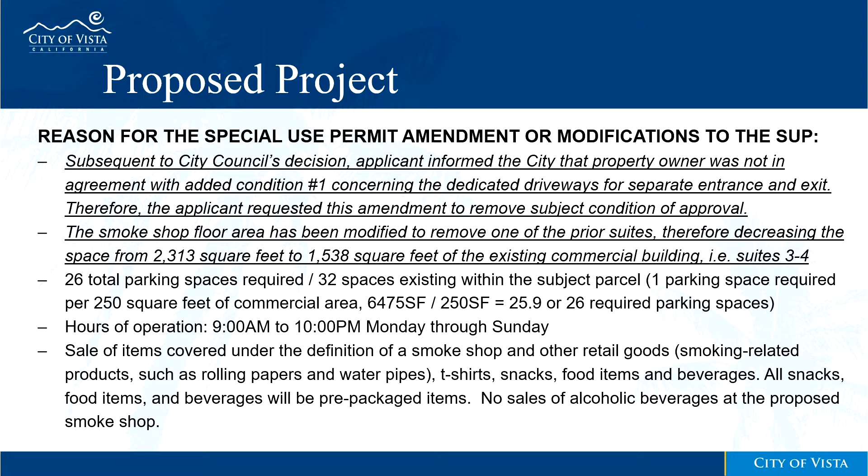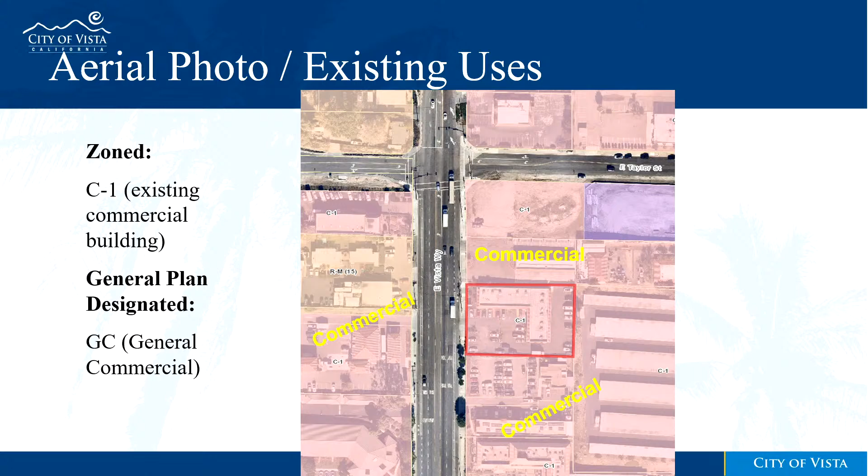The zone is C1, a basic commercial zone. The designation per the general plan is general commercial, GC, and it's surrounded by commercial uses to the north, south, and across the street, as shown on this slide.

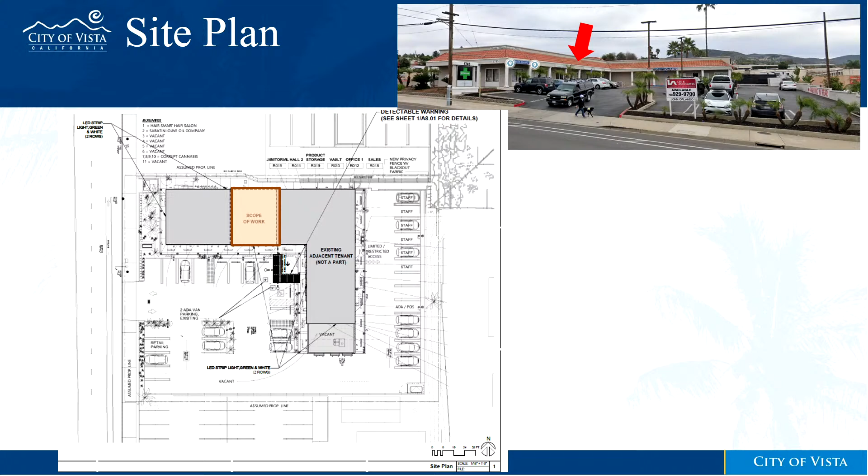Here's a depiction of the subject project site as it exists today, and the site plan identifying the smaller footprint floor area for the proposed smoke shop. The red arrows identify approximately the location where the smoke shop would be located, next to the existing cannabis store operated by the same operator, off the charts.

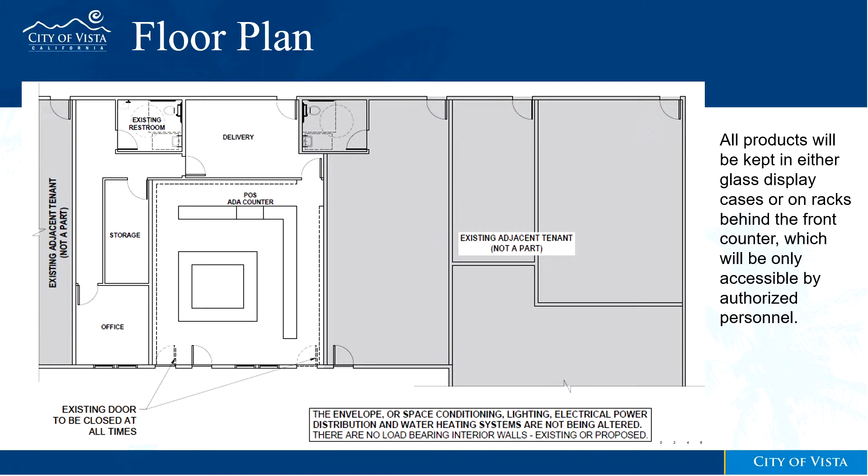The floor plan here shows the smaller footprint with the products kept in either glass display areas or cases on racks behind the front counter, all of which would only be accessible by the authorized personnel working at the store.

From an environmental review perspective, the project is categorically exempt from requirements to prepare an environmental document.

So staff looked at it for infill development project and meeting the infill conditions of Class 32 exemptions related to being consistent with the applicable designations in the general plan and the zoning ordinance, developed within city limits on a site that's no more than 5 acres.

The project site does not contain habitat for endangered, rare, or threatened species. It is a developed site, as we all know it. The approval of the project would not result in significant effects as far as noise, traffic, air quality, water quality, and the site can be adequately served by all required public utilities and services.

The general plan, as far as the special use permit approval and adherence to all the conditions of approval, with that, the project would conform to the policies of the general plan.

And as far as the development code is concerned, the approval of the special use permit for establishing the smoke shop and the findings for such special use permit are included in the resolution of the special use permit.

There is one condition, the understanding that the smoke shop will not be located within 1,000 feet of a public or private elementary or secondary school, and there is no private or public elementary or secondary school within 1,000 feet of the project site.

With that, the recommendation is for the adoption of the resolution, that would be granting the modifications to the special use permit for the smoke shop at 1745 East Vista Way, Suites 3 to 4.

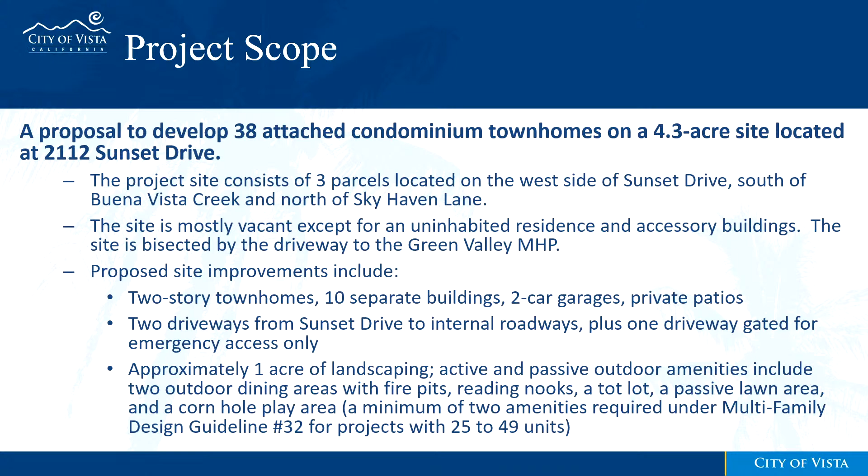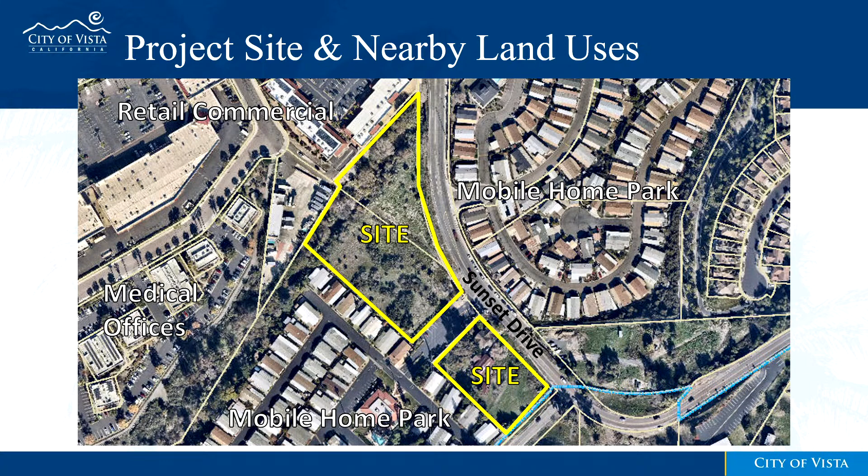This aerial image shows the project site and surrounding land uses. The project site is bisected by the driveway to the Green Valley Mobile Home Park. On the other side of Sunset Drive is the Santiago Mobile Home Park. To the north, across Buena Vista Creek, there is retail and commercial service uses. And to the south is the City of Vista boundary adjacent to Oceanside.

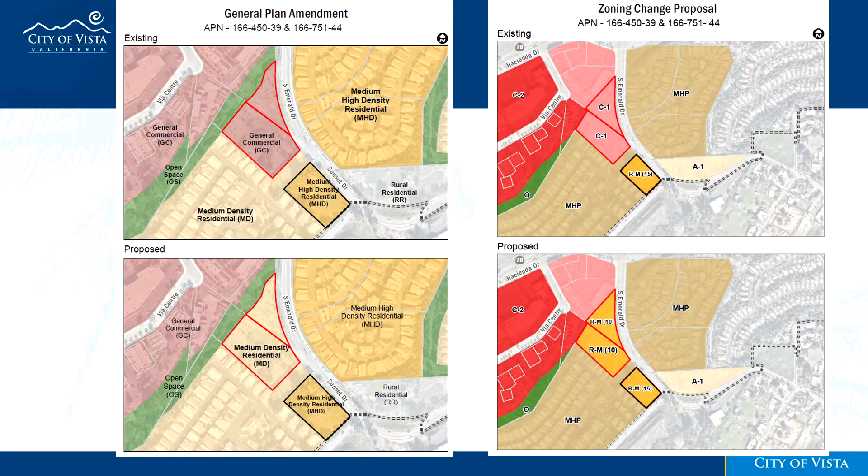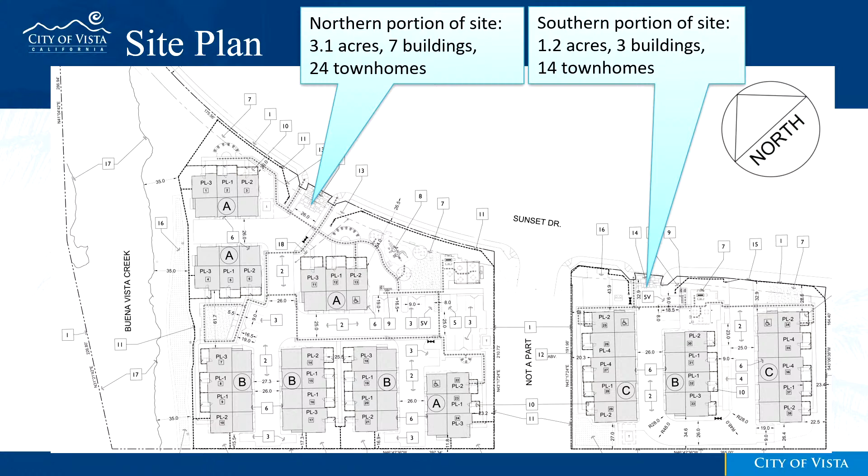The project includes decorative paving at the project entrances. The gated emergency access would be the furthest driveway towards the right-hand side of the slide, and that would be gated as mentioned.

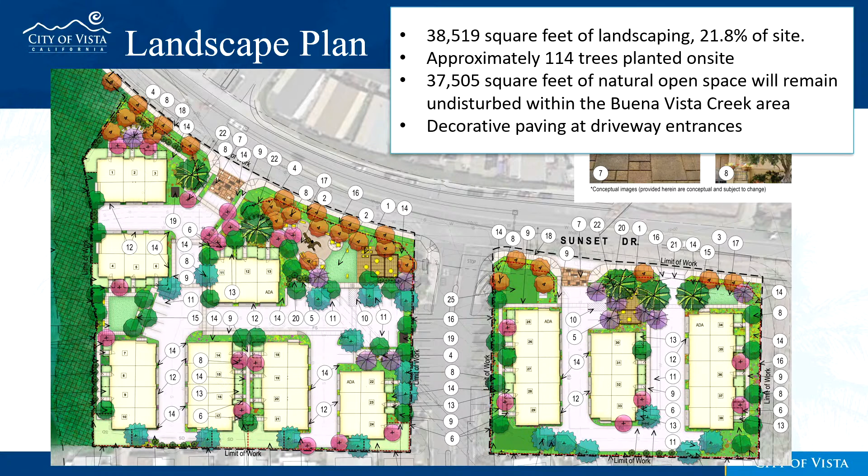The southern portion is very similar. It also features a dining lounge with a shade structure, barbecue areas, a fire pit, and so on, as well as what is depicted on the north side.

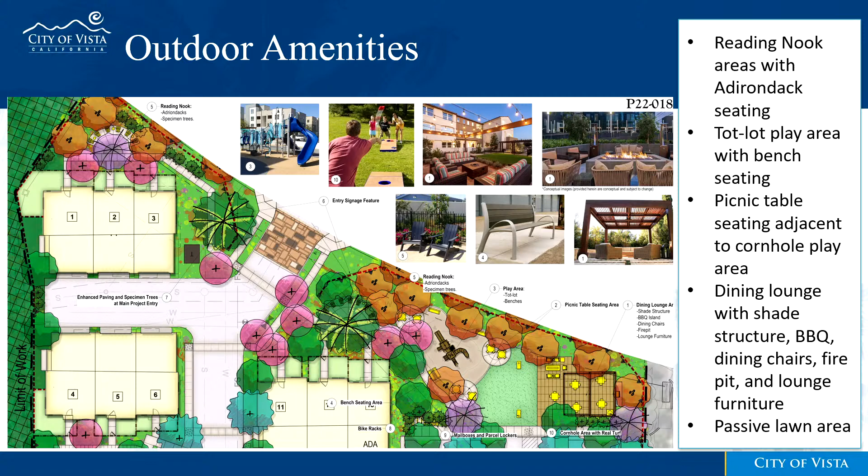The project would also be required to install 2 speed feedback signs at either end of the project site, for traffic going northbound or southbound. Those are the type of signs that flash the driving speed at drivers as they pass by, so they know if they're exceeding the speed limit.

Other improvements would include curb, gutter, sidewalk, and a bicycle lane on the project side of the street, and the sidewalk would connect to the existing sidewalk that's north of the project site.

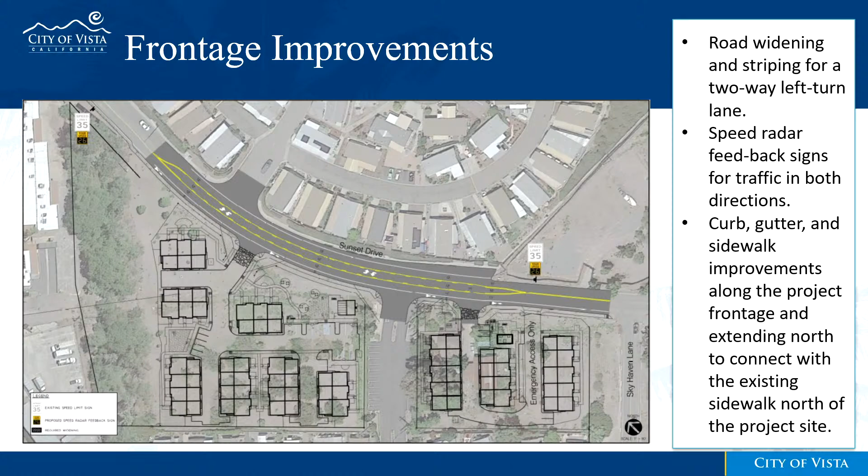Regarding the townhome structures, the project would be developed with an average density of approximately 9 units per acre—8 units per acre on the northern portion of the site and 12 units per acre on the southern portion. The project includes 4 different floor plans, with sizes ranging from 1,440 to 1,780 square feet, including 14 2-bedroom units and 24 3-bedroom units.

On the first floor of the units, there is a 2-car enclosed garage for every townhome, kitchen, living, and dining areas, and a half bath. On the second floor, there are 2 or 3 bedrooms, full bathrooms, and washer and dryer hookups. Additionally, 30 units would include a loft area on the second floor designed for use as an upstairs living room.

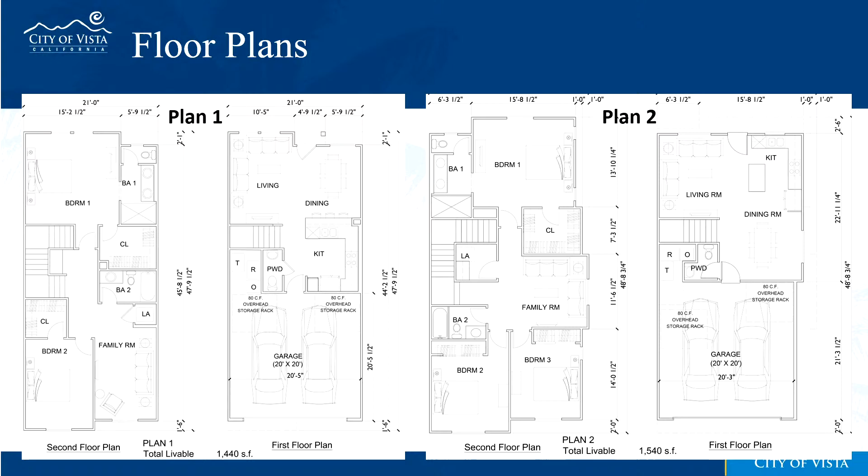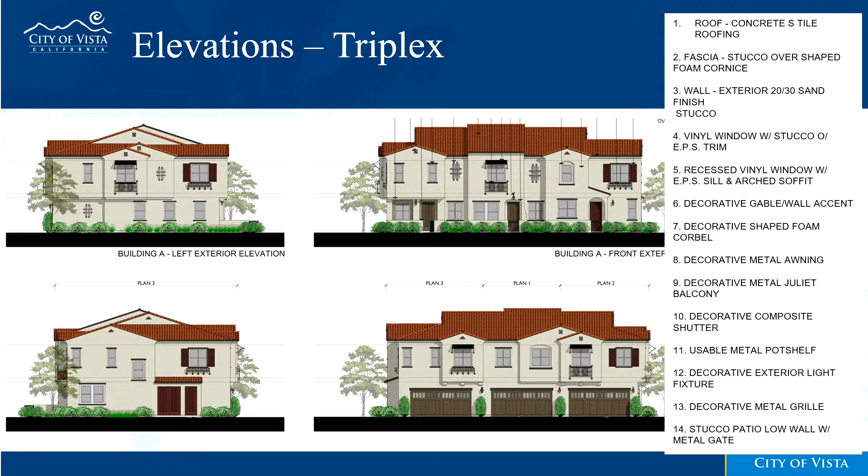These are the elevations for the triplex buildings. Everything is done in a Spanish style of architecture with concrete S-tile roofing, wrought iron features on the walls and around the window areas, faux Juliet balconies, and decorative gable accents.

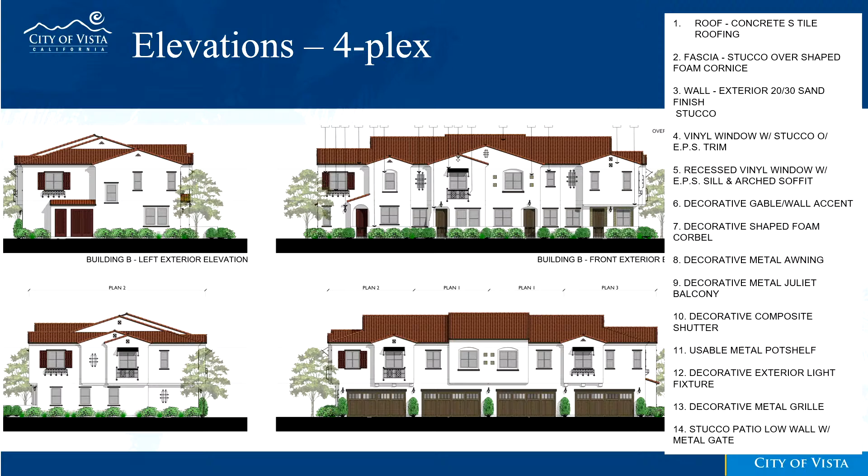Regarding project parking, the 14 2-bedroom units require 2.5 parking spaces per unit, totaling 35 spaces. Adding that to the 24 3-bedroom units, which require 3 parking spaces per unit for 72 total spaces, the total required for the overall project is 107 spaces.

The project provides a total of 110 spaces—76 of those are 2-car garages, and there are 34 open guest spaces. Of the guest spaces, 10 are located on the southern portion of the project site, and 24 are located on the northern portion.

Under public policy, general plan conformance, the southern portion of the project site is currently designated as medium-high density residential by the Vista General Plan, which allows 15 dwelling units per acre. Since this portion is approximately 1.2 acres, construction of 14 townhomes would result in a density of approximately 12 units per acre, consistent with the existing MHD land use designation.

The northern portion of the site is currently designated as general commercial. Since this portion is 3.1 acres, construction of 24 townhomes would result in a density of approximately 8 units per acre, which would be consistent with the medium density residential land use designation.

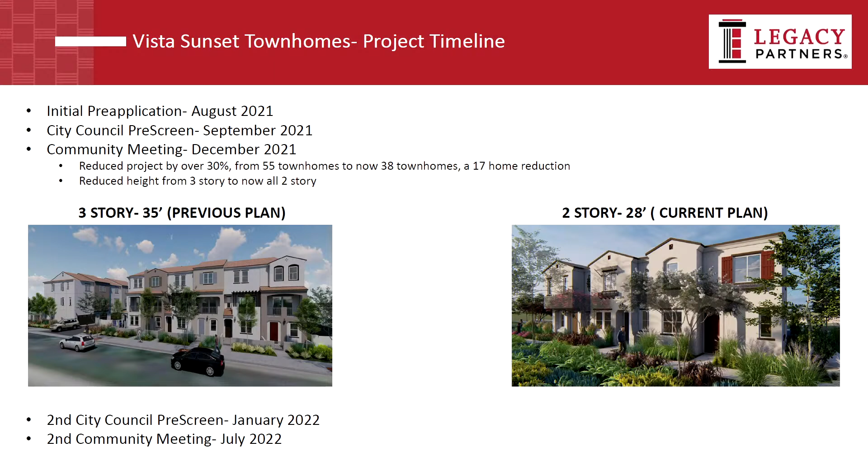Chris did a good job going over the site plan, 4 different plans, range of square footages, 2 and 3 bedrooms. We do exceed parking standards barely, and we do exceed open space requirements, common and private.

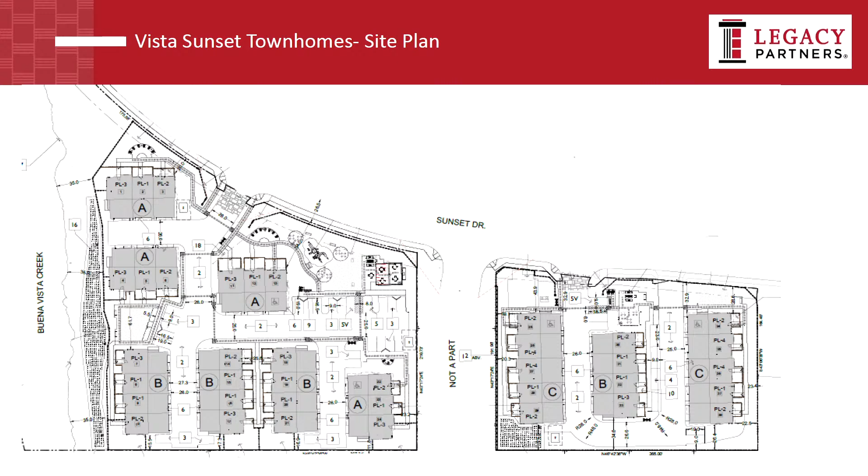Here's just the renderings, some attractive Spanish architecture. It's 20 feet to the eaves and about an additional 10 feet to the pitch of the roof. We can play with that height. It's worth noting that in the C1 zoning on the northern parcel, that allows up to 35 feet.

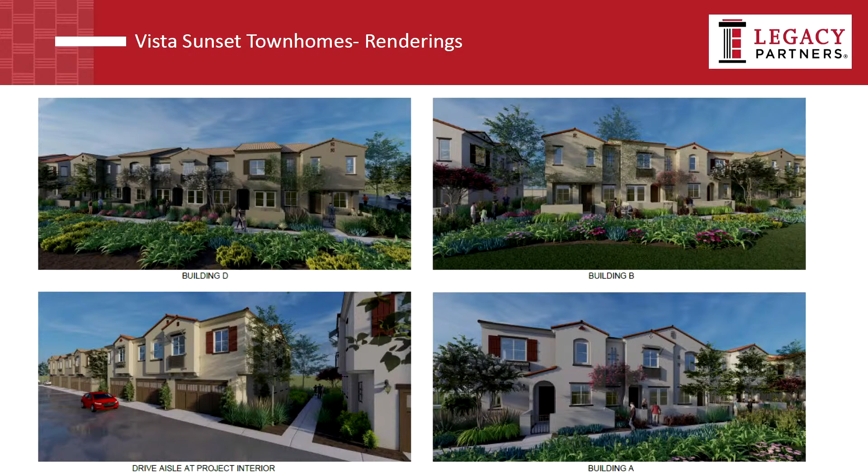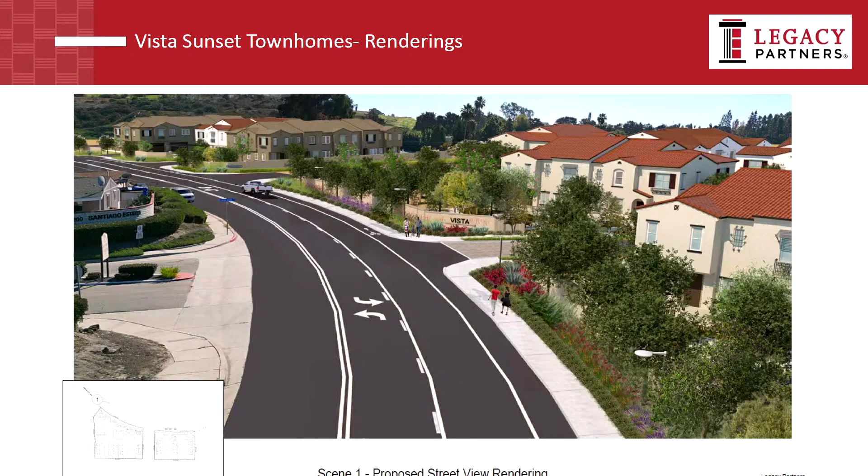Here's some renderings, not 100% to scale. Our landscape architect did his best, but we were pleased with this image. What this shows is how that street, currently a 2-lane with no improvements, just raw land, where we've added the yield lane, restriped, added a bike lane, new curb, gutter, sidewalk, and a nice landscape setback. Here's the northern parcel entrance.

So the biggest part of this was trying to accommodate the community's feedback and concerns. We held 2 community meetings, about 15 attendees per meeting. These bullets were the common theme of the feedback, so we went to work trying to address each one to the best that we could.

Traffic being the most important, so I'll touch on that last.

Homeless - there's been history here that people have lived on site, lived in that home, have destroyed that home. They even had gardens back there, and the landowner has had to move them off the property a lot of times. I think some of those folks have meandered into the Green Valley community, which was expressed to us during one of the community meetings. So I think adding housing and removing the blight will hopefully eliminate a lot of those issues.

The condition of the wall along our property line on the western edge between Green Valley and our property - there's been issues with that wall falling over, there's a tree growing through it. The current landowner has had to deal with that, working with the property manager, Bruce, but we are intending to replace that wall.

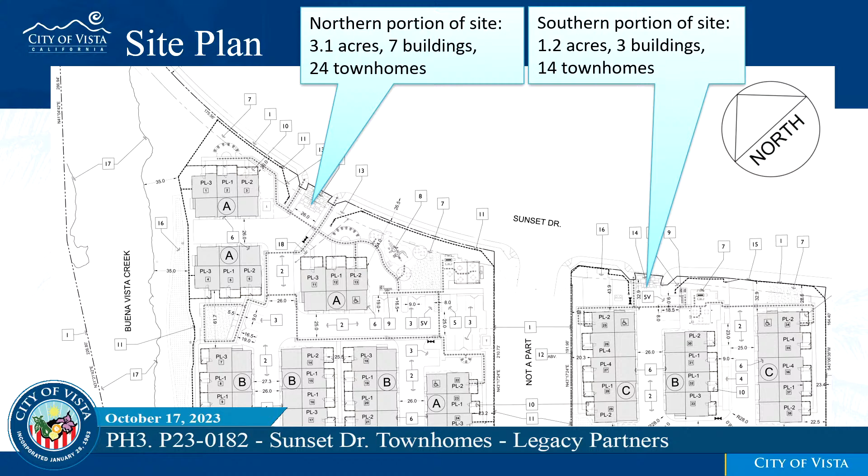The rear is 5 feet? The one to the mobile home on the west, that's 5 feet, right? I'm talking about this right here. We did have one setback, I believe unit 24, that needed to be corrected. There was an inconsistency on a couple of the plan sheets. On the exhibit currently shown, it shows 11 feet 8 inches, and that needs to be adjusted to 15 feet. That is one setback issue we're aware of. Oh, that's 15. Okay, thank you.

There's a lot of lines on the civil drawings, and if they could have been more clearly designated, it would have been very helpful. Thank you.

So, if that does it for our questions, thank you very much, Mr. Pinto. I'm sure you'll be back.

We'll open the public hearing, and the first speaker is Steve Harvey, followed by Joe Frischman. Mr. Harvey, you have 3 minutes.

Before I start my 3 minutes, you guys have a copy of this? Yes, I brought one for you. Yes, okay, and you mentioned it, John. Thank you for mentioning it. I'm just going to highlight it, it's too long to read in 3 minutes.

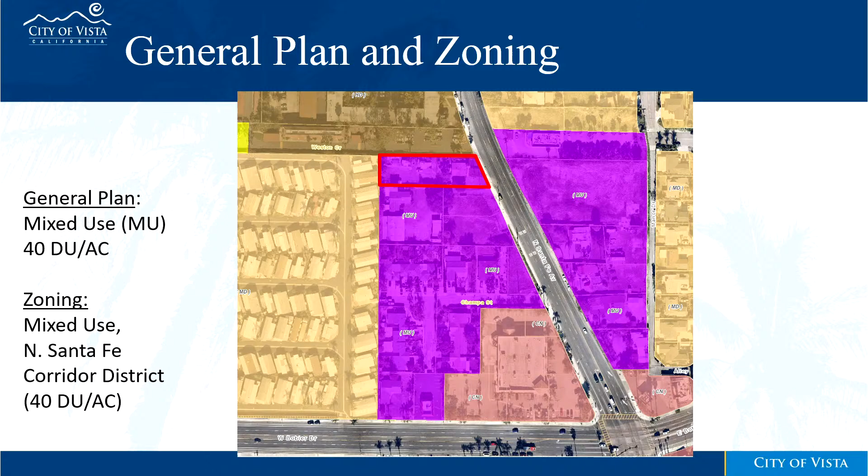The zoning is mixed use with a North Santa Fe Corridor District, at 40 dwelling units per acre.

In terms of the project, once it comes formally through to us for review, it would require a site development plan, and being in the mixed-use zone, the total is 33 apartment units, with 4 allocated for very low-income households at 50% of the area median income.

The setbacks are 14 feet 4 inches on the front, 66 feet on the rear, 4 feet on the side. That actually is encroaching into the setback, so potentially that would be one of the concessions allowed under the state density bonus law.

24 would be 1-bedroom units, and 9 would be studio units. The proposed density is 62 dwelling units per acre, where 40 is allowed per the general plan.

The height is 4 stories, approximately 59 feet 7 inches. Maximum would be what's proposed.

The residential parking would call for 42 spaces required per the MU40 zone. 33 spaces are provided, per the state density bonus parking ratio, which allows it at 1. So the requirement would be only 33 spaces total instead of the 42.

When you have 25 or more units as part of the project, you are required to provide 2 recreation amenities. There are 2 common decks, a co-working space, and a bicycle storage being proposed right now to meet the requirement for recreational space and amenities.

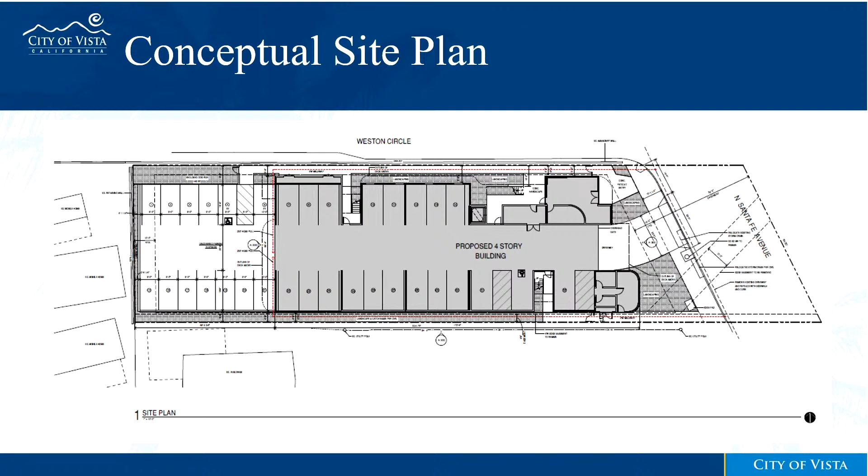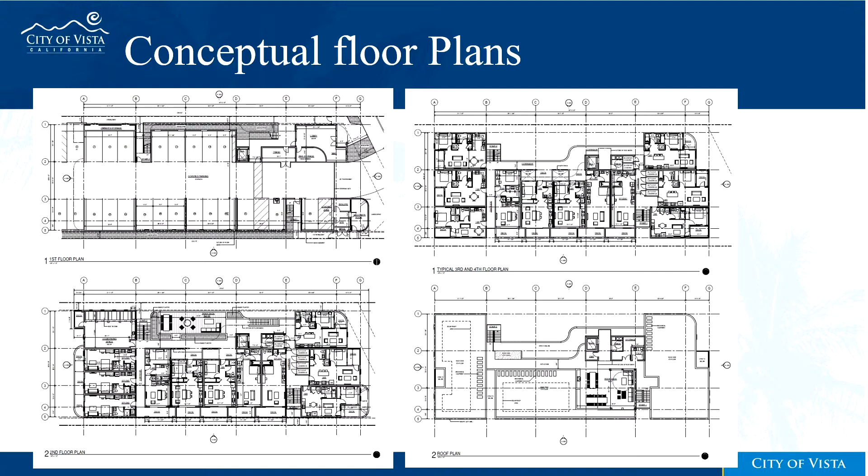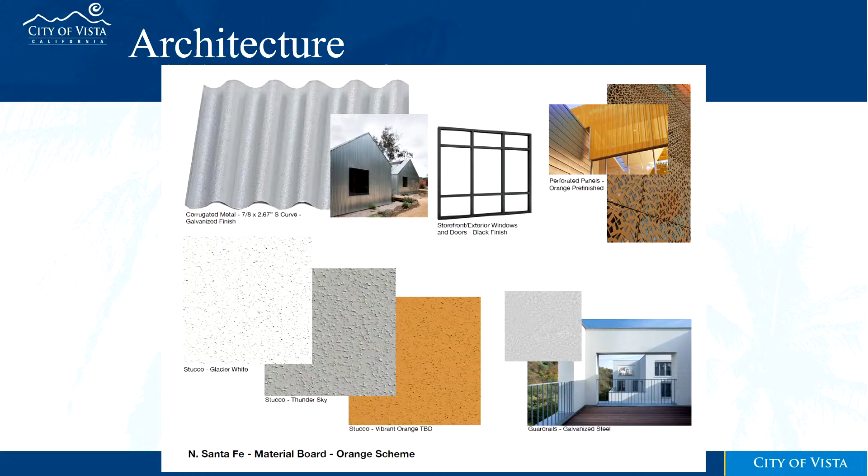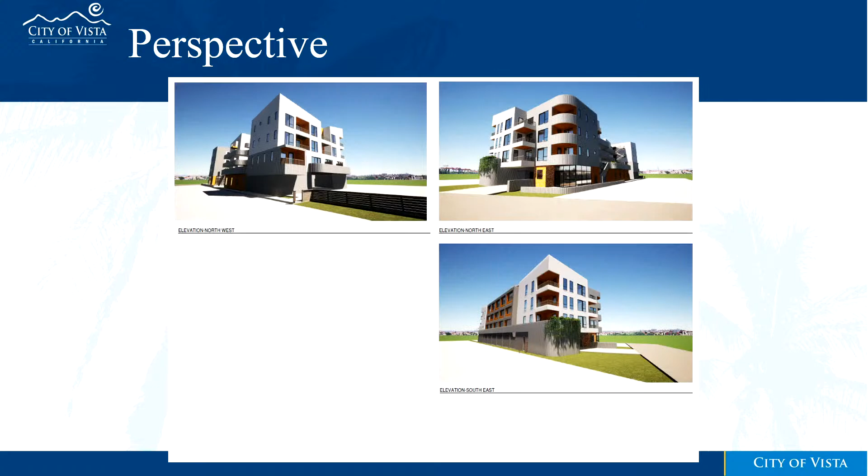The staff request here is for the Planning Commission to provide direction to the applicant related to the proposed design of the project. No formal vote action is sought tonight on this item, and we're here available for any questions. Staff is available, and the applicant as well in the audience.

Thank you very much. So the applicant doesn't have a presentation? They do not. Okay, very good.

Commissioners, what we normally do in the EDRs is first talk about the site plan and the layout, then the floor plans, then architecture, and then amenities. So any comments on the site plan for this project?

Commissioner Savage: I never know when to talk about trash, so it's kind of site-related since it's inside the building. I'd be very curious to see how they're going to handle the trash. Looks like they'll have to wheel out the trash to the street or maybe to the driveway. I don't know if we could ask the applicant, but I don't know if you guys have contacted EDCO for a plan. I know that would definitely be something we'd like to see before the actual hearing.

Name for the record, please. My name's Colin Lowry, I'm the architect. No, we have not contacted EDCO yet. And yeah, you're correct, it's within the building, so we would have to wheel out the trash bins on trash day. But that allows us to give them a trash chute as opposed to tenants dragging their trash to the trash room, so I guess it's a trade-off.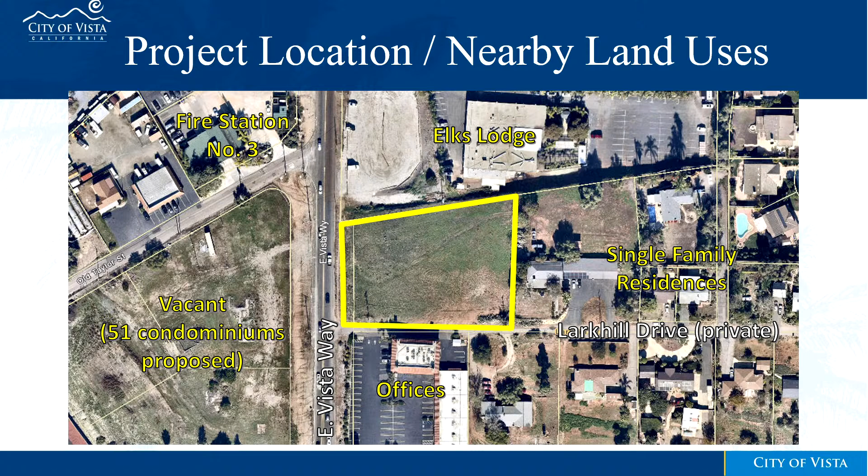This is an aerial image showing the adjacent land uses and the vacant project site. There is a 51-unit condominium project proposed west across East Vista Way that should be coming up at some point. Fire station number 3 is to the northwest, Elks Lodge to the north, and existing single-family residences towards the east. There's an office building immediately to the south on the other side of the private drive.

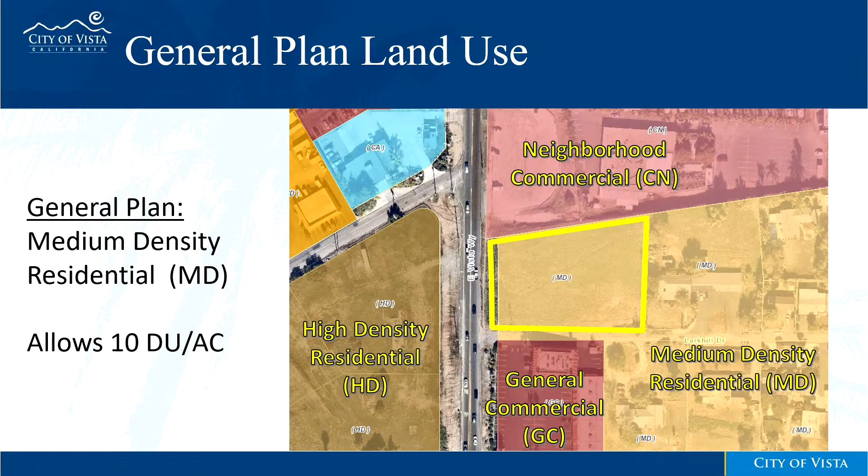The existing general plan density or designation for the property is medium-density residential, which allows up to 10 dwelling units per acre. The zoning is RM10, which is consistent with the general plan.

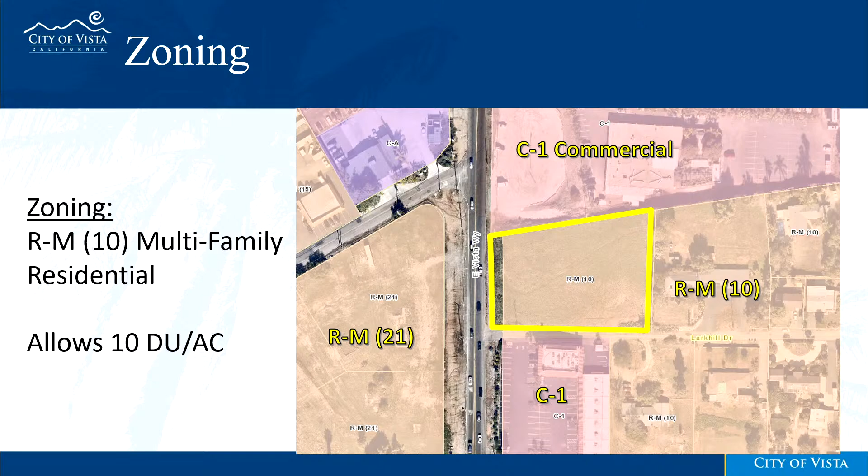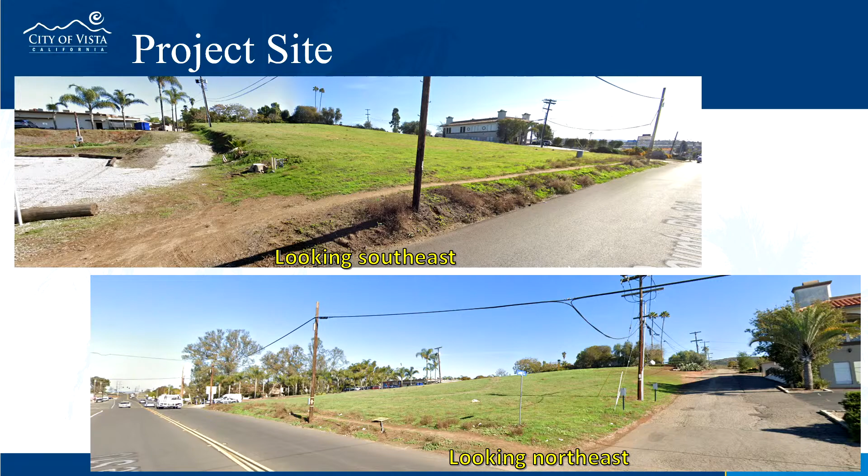The project is proposing 13 apartments in 6 buildings. All 3-bedroom units are proposed, ranging from 1,290 to 2,661 square feet. 2-car enclosed garages are included for each unit, and 2 of the units do include 3-car garages. The proposed density is 9.5 dwelling units an acre, which would comply with the 10 dwellings an acre that's allowable. The height of the structures is 2 stories, 26 feet, 8 inches. Maximum allowed in the zone is 35 feet.

For parking, there's 41 total, consisting of 28 garage spaces and 13 guest spaces, where 39 are required by the zoning ordinance. For open space amenities, there's 5,268 square feet of common open space provided, where 4,875 square feet are required. Each unit features a private balcony ranging from 132 to 224 square feet, and each unit features private ground level open space ranging from 300 to 560 square feet.

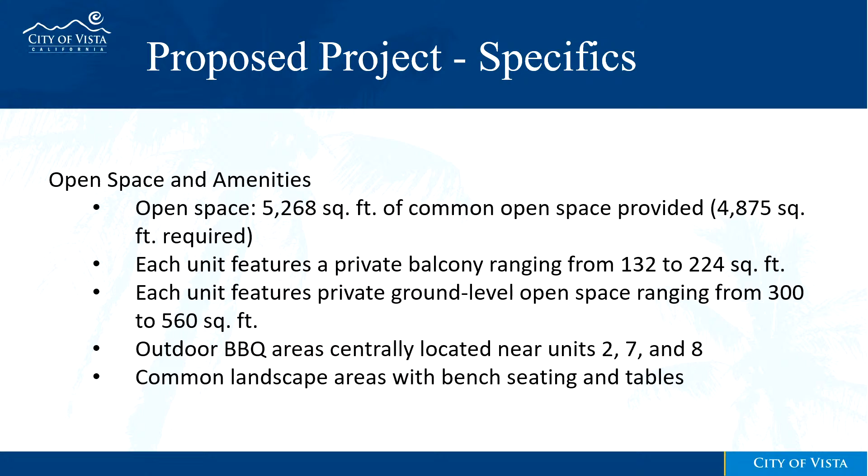Outdoor barbecue areas are centrally located near units 2, 7, and 8, as will be shown in a subsequent slide. Common landscape areas with bench seating and tables are located in the central area of the project site.

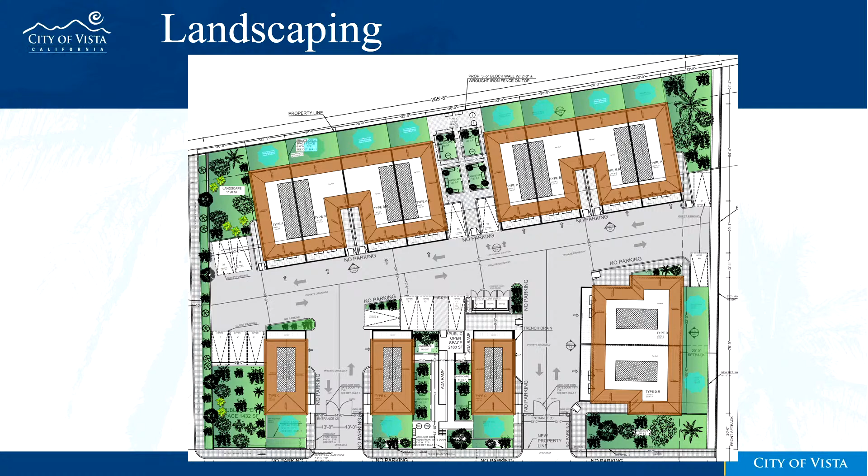The project proposes 2 fourplex buildings, which is unit type A, with 4 units, and unit type B, also 4 units. These range from 1,600 to 1,900 square feet. There's 1 duplex building, which contains the largest units on the property, located towards the rear on the right-hand side of the slide, approximately 3,000 square feet. There's also 3 single unit buildings, which are type C, just under 1,300 square feet in size.

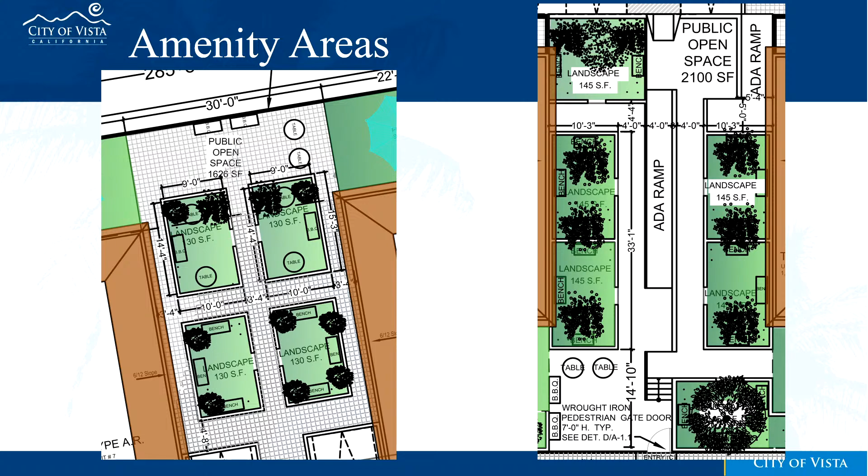These are the amenity areas that I mentioned, small landscape areas adjacent to barbecue areas, basically with seating and tables for passive use.

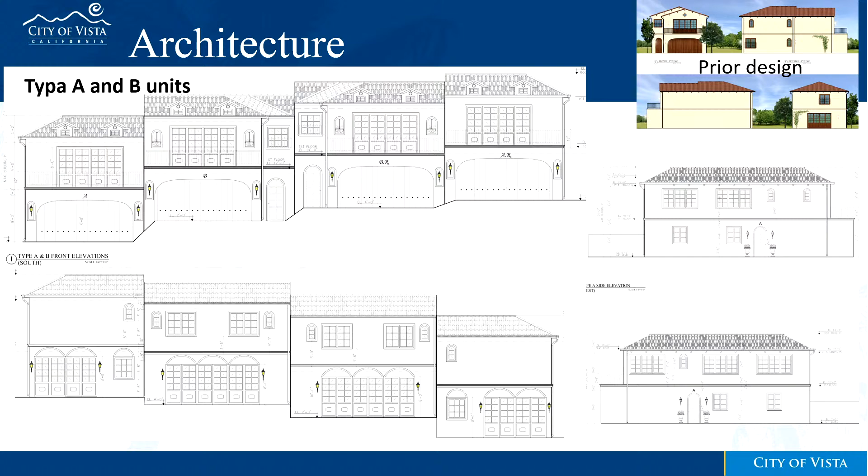A few other modifications were made. One of the primary changes was to the roof line design. This slide also shows prior design at the upper right, and these are the black and white elevations for the fourplex buildings.

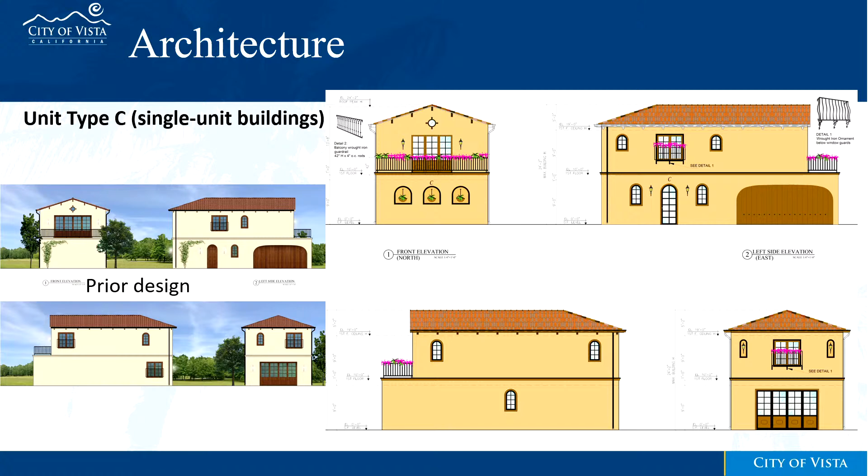This is unit type C, which are the single standalone units, shown as prior design and as revised and proposed. And this is unit type D. One of the comments previously given was to break down the large 3-car garage door, and that's one of the changes represented on this slide.

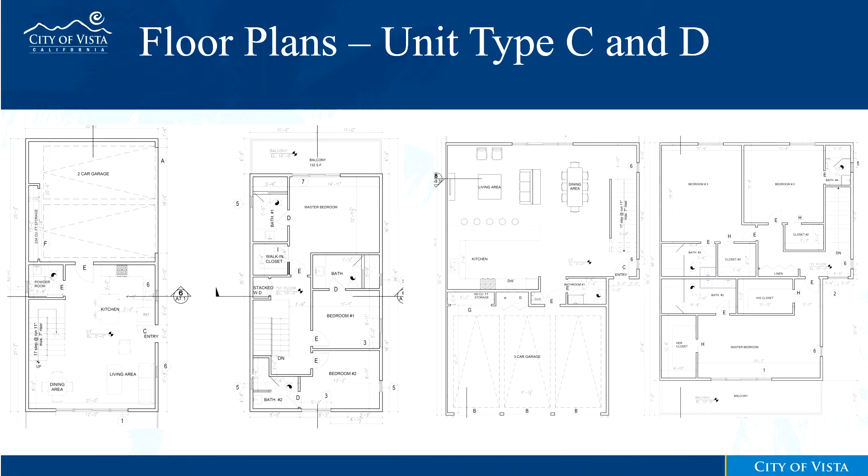The floor plans are shown on the next slides for unit types A, B, C, and D. They'll be available for discussion with the applicant, and staff requests that the Planning Commission provide their comments regarding the proposed design.

Thank you. No presentation by the applicant? No. Okay. He's getting up. Come on.

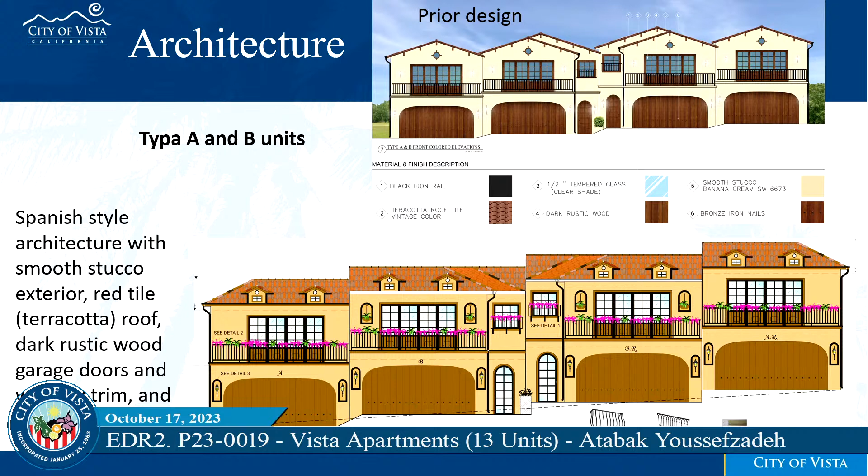Good afternoon, my name is Atabak Youssefzadeh with Metropolis Architecture. Thank you for your help and work here. Thanks, Chris, for all the help. I'm here to answer any questions that you have. Okay, very good. Hang on. Well, I'm sure there'll be some.

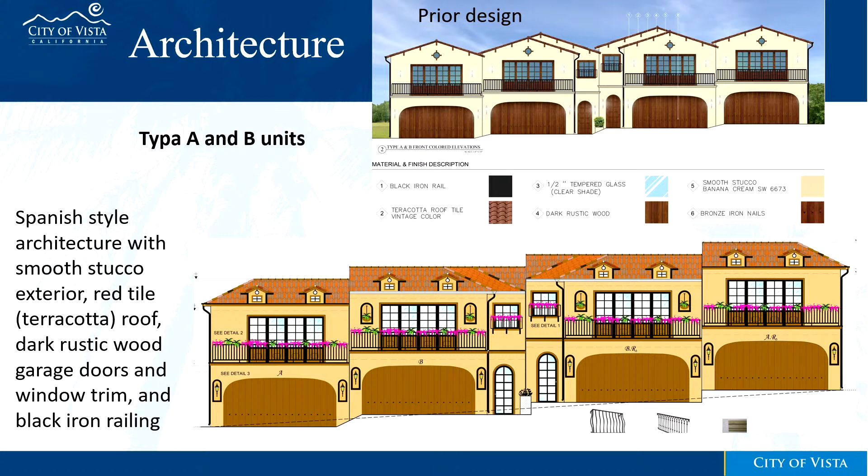Commissioners, comments on the site plan? Commissioner Savage: this is somewhat site-related, about the street, Lark Hill Drive there. This might be a question for staff, but that's a private drive, so we don't really have any authority on enforcing paving of that road, correct? I believe that's correct, yeah.

So there was some concern from citizens behind the property. I didn't know if they had made those available to you, but we did receive some emails concerned about construction traffic on Lark Hill Drive and the damage it might do. I don't know if you've had any contact with the community yet about that, or if there's any plans. Chris spoke to me about the problem that might arise because of the construction.

And if there is any breakage or any problem with the road, we'll basically repair that and blacktop over the road, so the neighbors would not complain about the condition of the road.

I really like a lot of the things you guys did. I know it's architectural, but the sides of the buildings, you guys did an amazing job changing that up, so I appreciate that. Thank you. Mr. Looney made some great comments last time, and we appreciate that. We went back to the drawing board and implemented that.

The owner is here. He's owned this property for the last 30-some odd years, and he does not plan to sell it. He wants to keep it in the family, so this is going to be one that's going to be keeping in this family.

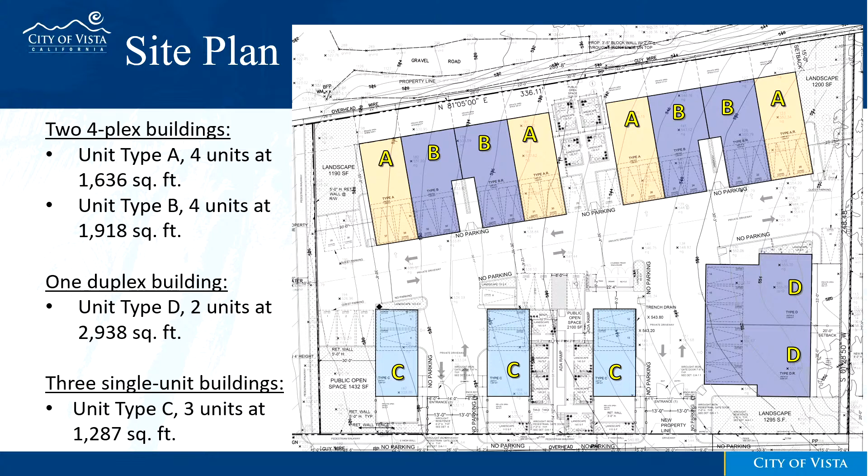The walls have to stay under a certain elevation, like site walls. I'm not really sure, for a private drive, I don't necessarily know that the city would be reviewing it. Generally, it is something we look at when a driveway is exiting onto the public right of way. We're going to review the site plan for any proposed structures, monument signs, or anything that might obstruct view. Okay.

This seems better than last time for sure. You guys did a good job of pushing that back and making sure that it is a little more visible. That'd be something I'd consider while you guys are doing design - just make sure that everyone's safe when they're leaving the driveways, that there's nothing obscuring their views. And I don't think you guys have.

I haven't had a great time looking at it, but the landscaping at the edge of the C buildings there - just making sure that any walls or fences right there don't obscure view, keep everybody safe. Okay, I'll review that to make sure the view is right for the drive. Yeah. Return. Okay, any other comments on the site plan?

Commissioner Looney: Yeah, it's good to see some improvements. One of the comments that was made last time was to have a civil engineer do a grading plan. The grades still don't work.

We've got a lot of drop in a very short amount of time, especially on the north buildings. Having an accurate grading plan is really going to help us, because what is seen on sheet A1 doesn't work when we start looking at the south elevations of the north buildings. In some of the elevations we've got 4-foot drops, and then we've got 2-foot drops, but it doesn't match the site plan. So there needs to be consistency between the topography lines shown on the site plan and what's reflected on the exteriors.